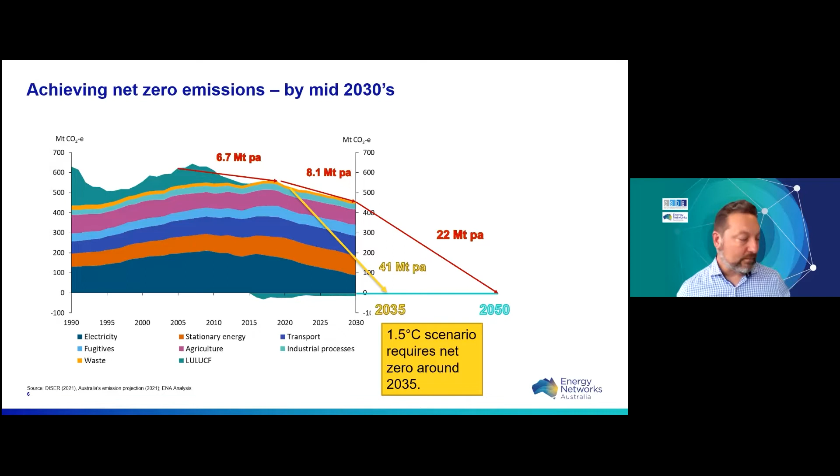So I'd like to talk about the role of renewable and decarbonised gas in helping us achieve emission reduction targets. In 2017, we produced a report called Gas Vision 2050. This was developed across the gas industry, including upstream gas producers, pipeline and distribution networks, and appliance manufacturers. It was a document in response to the Paris Agreement on climate change, outlining how transformational technologies would be deployed to reach net zero emissions from using gaseous fuels in Australia.

There are 4 pathways of reducing emissions from gas use. I'll briefly talk about some of these, then talk about decarbonising the fuel in more detail.

So energy efficiency is a technology that's quite well known. It's basically trying to replace existing appliances with more efficient appliances. We're also upgrading homes with more efficient features, such as increasing insulation. Closing your window and curtains at night is also a good way of increasing energy efficiency. That's actually, in some ways, a low cost strategy of reducing emissions, because if you don't use the energy, you don't produce emissions associated with it.

On the right-hand side, I've got carbon offsets. Once again, that's something that's currently available. It's quite easy to purchase carbon offsets. Most of the major electricity and gas retailers offer carbon offsets on their products, so you can already have net zero energy at the moment.

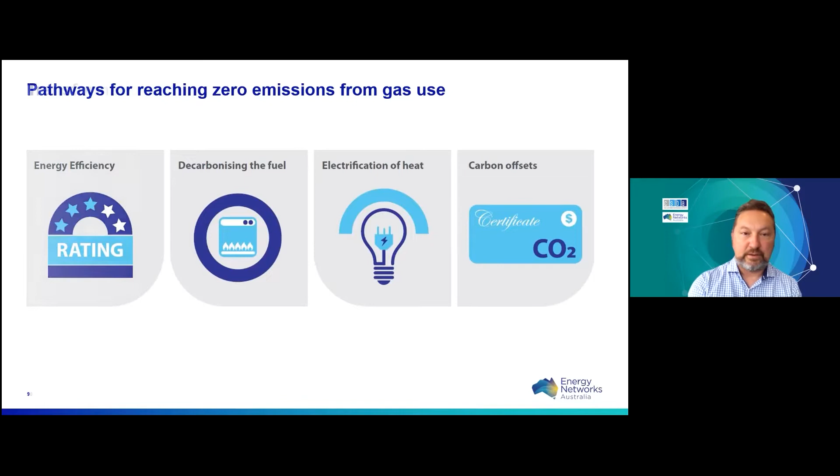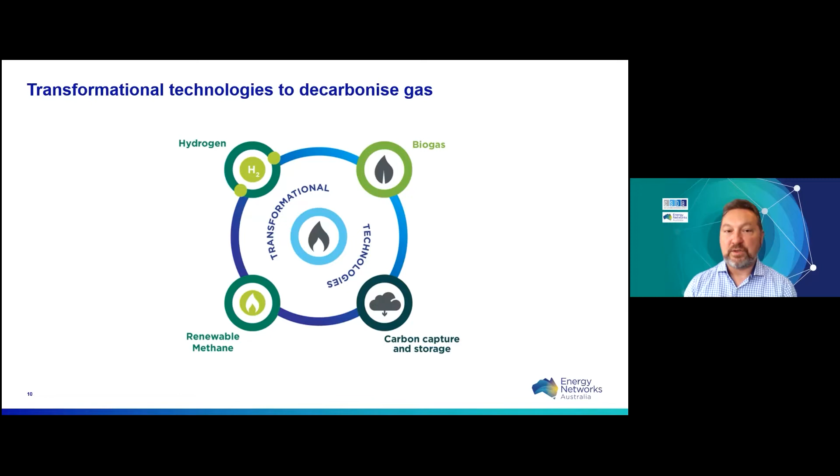Then I'd like to talk more about decarbonising the fuel, which is basically through transformational technologies. There are 4 transformation technologies we identified in Gas Vision 2050. One is the use of hydrogen, another is biogas and renewable methane, which are actually very similar - I'll talk about that as well. And then there's carbon capture and storage. I won't focus so much on that, as it's more a technology upstream for reducing emissions from industrial processes, gas production, and power generation. I'll focus more on the other technologies which provide emission-free gas that can continue to be used.

So we're on a journey to convert networks to actually produce and transport renewable gas by 2050. When we outlined our original document, we thought the next 5 years from 2017 up until the early 2020s would really be about beginning or doing more innovation and demonstration projects. I'll show in the next slide how we progress in that. Then in the next 5 to 10 years, probably towards the end of this decade, we'll be looking at reducing emissions by blending biogas and hydrogen in gas networks, replacing part of the natural gas with a renewable gas product, which lowers emissions. Then in the longer term, fully converting to that emission-free biogas or hydrogen.

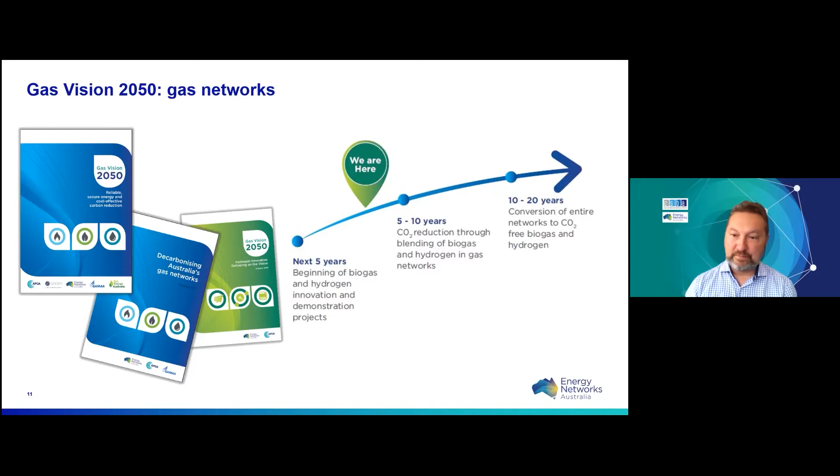This slide shows how we've already progressed that, how industry has already progressed that. There are a number of projects already operational - this slide I could probably talk to for 15 minutes, but I won't. I'll just briefly highlight that there are projects operational in Adelaide and Western Sydney that are already injecting hydrogen into the network, so customers are already receiving a small blend of hydrogen in their network. There's also plans for new projects to blend hydrogen into industrial precincts, and plans for larger scale projects where hydrogen can be blended into whole towns.

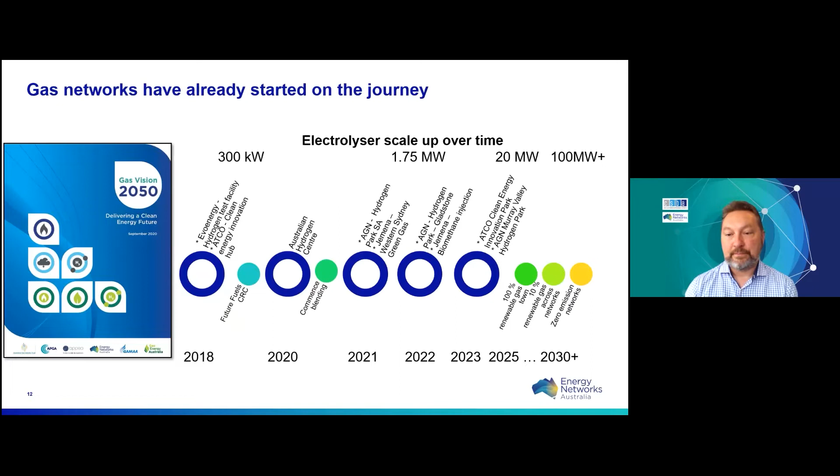So I'd like to talk a bit about the different pathways of producing renewable gas. This diagram shows how renewable methane can be produced. There are two general pathways. One uses organic waste - for example, landfill waste or organic waste such as food scraps from the house - that can be put into a biodigester, which then produces methane and a few other gases. Once that's cleaned up, it produces biomethane, which can be directly injected into the network once it's cleaned up to network specifications, and it basically works the same as natural gas.

The lower part of the diagram shows a synthetic renewable methane pathway, which looks at using hydrogen, reacting that with carbon dioxide absorbed from the air, and that also produces renewable methane, which similarly can be injected into pipelines and networks, and works the same as natural gas.

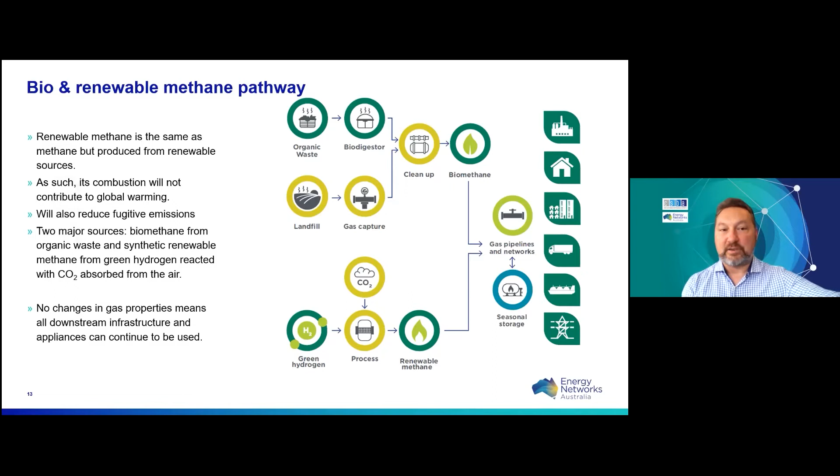One of the main challenges with biomethane is the resource potential. There's a lot of uncertainty about how much resource is available to produce biomethane and how easily it can be collected. Some of the feedstocks include organic wastes, agricultural waste, forestry waste. There's also discussion about energy crops, where crops are grown for the sole purpose of producing bioenergy.

There's a high level of uncertainty in the estimates of how much of this resource is available. But a recent report by ARENA, their bioenergy roadmap, showed that there's 2,600 petajoules of theoretical resource potential, and they saw that that could possibly produce 33% of gas in networks by 2050. As a reference point, the gas in networks for residential consumption across the country is 166 petajoules. So when you compare those two numbers, there's an awful lot of potential, but there's also an awful lot of uncertainty in that 2,600 petajoules and whether it is accessible or not.

That's why I mentioned on the previous slide the synthetic renewable methane, because that's another pathway that can provide that renewable methane.

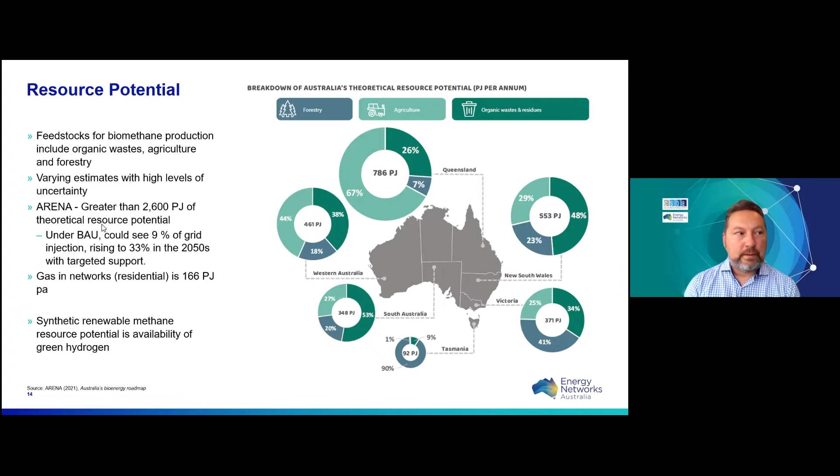There are also options in terms of revenue. In the biomethane process, you produce fertilizer, and you also avoid depositing the waste in landfill, so there's some revenue options. There's also policy options, and they've been deployed quite readily in the UK and in Europe. By a combination of all those different configurations, we're able to get to a competitive price for biomethane compared to the Sydney gate price for natural gas. So that provides a lot of opportunity there.

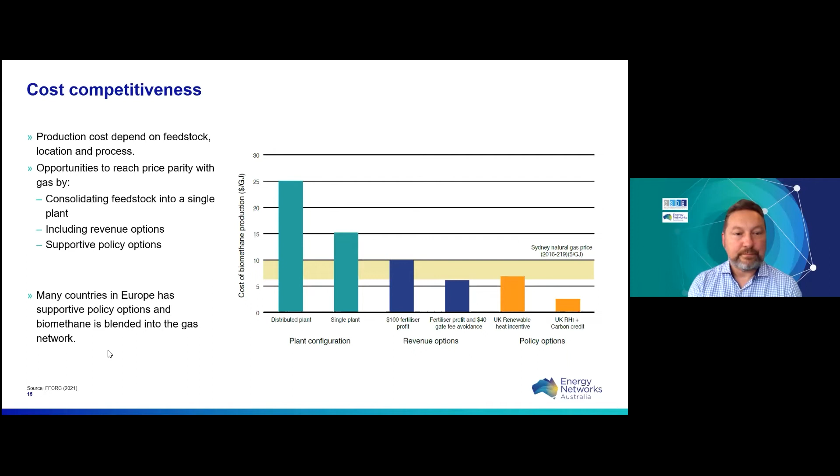So what are some of the implications for customers for biomethane, bio-renewable methane? It's a net zero emissions gas, and it's basically the same as natural gas, so it can continue to be used - you can continue to use the same appliances and have the same experience. There is uncertainty around the availability, but that can be supplemented by synthetic renewable methane. And there's also some discussion about what's the competition for this resource - will it possibly end up in a higher value sector, for example, aviation?

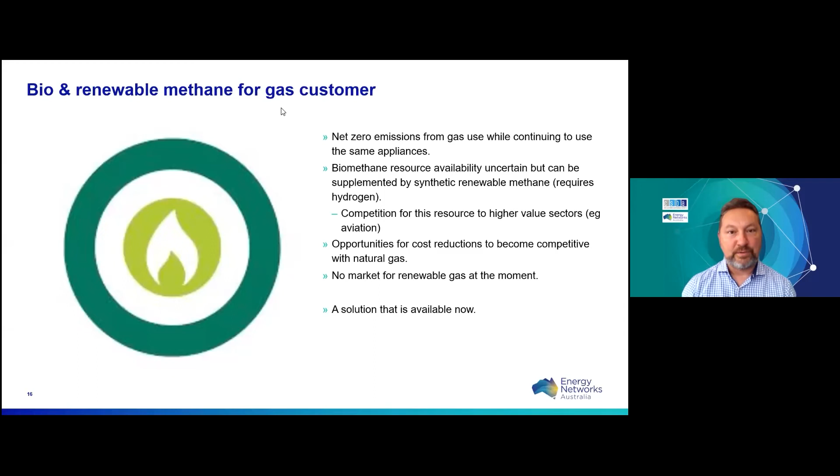There are opportunities to reduce costs to become competitive with natural gas. But at the moment, one of the main limiting factors for customers is that there's no market for renewable gas at the moment. There's a lot of demand for customers who want renewable gas, there's people who want to supply renewable gas, but there's still no market at the moment. So it's something that we need to work on.

Now I'd like to turn my attention to renewable hydrogen. This pathway shows that hydrogen can be produced from renewable electricity. It splits basically water from an electrolyzer - you apply renewable electricity to water in an electrolyzer that produces hydrogen atoms and oxygen atoms. Those hydrogen atoms are captured and then compressed, and they can be used as a replacement for gas.

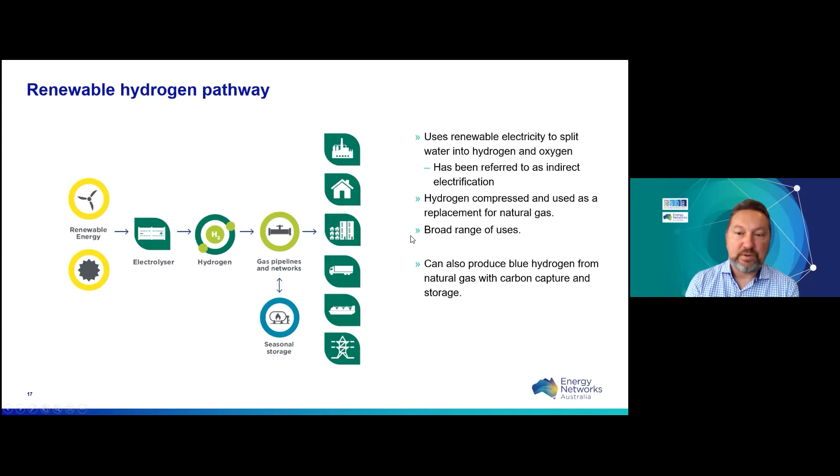Hydrogen has a broad range of uses, and I've got another slide coming up which shows that. It can also be produced from other energy sources, for example, natural gas with carbon capture and storage. There's a whole rainbow of colours of hydrogen that identify the different sources it can come from. But the main thing is the hydrogen that's produced is emission-free, so when it's used and burnt, it doesn't produce any carbon dioxide emissions.

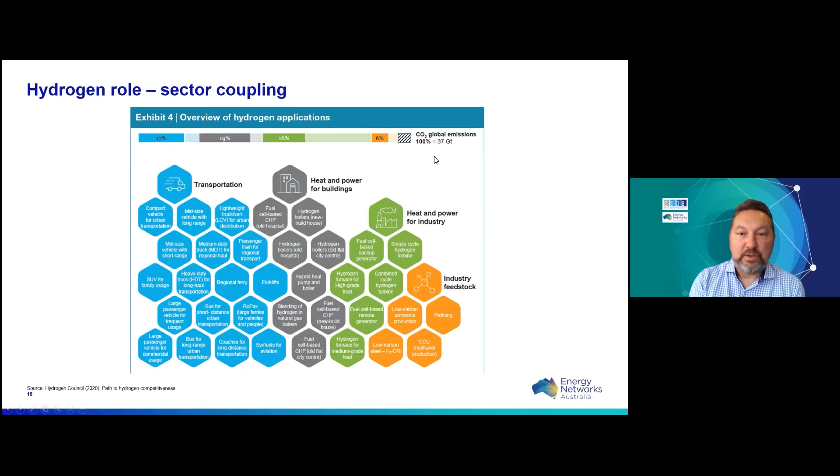This is that slide I was talking about with all the different applications. It can be used as an industry feedstock, for heat and power in industry and buildings, and also has a big role in the transport sector. So it has a very, very big role across the economy, and there's quite a number of projections out there that show the final energy demand in 2050 or so for hydrogen will be around 20 or 25% of the global energy demand.

Once again, cost is an issue at the moment. Currently, green hydrogen costs more than natural gas. Actually, grey hydrogen produced from natural gas also costs more than natural gas - that's not quite competitive at the moment.

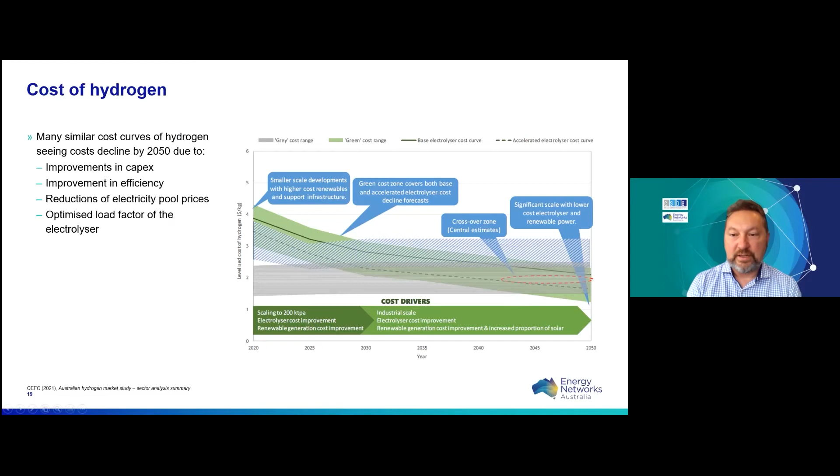There's a lot of work. I showed you a previous slide where networks are already investing in deploying hydrogen projects. And that work, combined with research across the world, is actually leading to major cost reductions in hydrogen. So by 2050, we'll see that green hydrogen becomes cost competitive with grey hydrogen.

What this also means is that hydrogen is competitive in some instances, for example, return to base vehicles. But for residential consumption, it's not quite competitive yet. This is some data from the Clean Energy Finance Corporation, which shows that the price gap between hydrogen and natural gas in 2020 is $1.50. That narrows to about 10 cents per kilogram in 2030, and in the early 2030s it levels out. By 2050, it shows that hydrogen is competitive as a fuel for replacing gas.

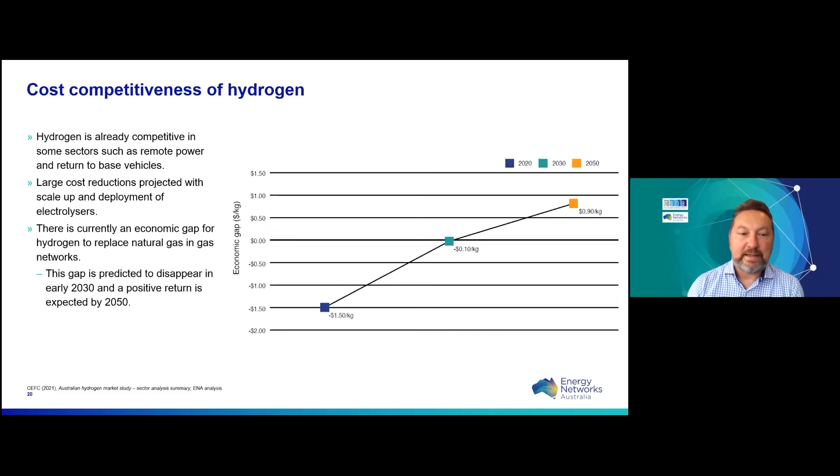Now, one of the things with hydrogen is that it behaves slightly differently to natural gas. So there's a role where we need to convert networks, and that's where there's some implications for customers. This is a conceptual pathway of how we convert networks across the country. From 2020 onwards, we can start blending hydrogen up to 10 or 20%. Appliances still work at that level, safely and effectively, so that's no concern.

Then there's a point where we need to convert a set part of the networks to 100% hydrogen. That will require appliance modification and a planned program to make sure that those appliances are converted in a safe and effective manner.

A lot of the networks in Australia, the gas networks, have already upgraded as part of their mains replacement program. That's really replacing their networks from the old cast iron pipes to new plastic pipes, and those pipes are actually capable of transporting hydrogen safely. So a lot of that work has already been done.

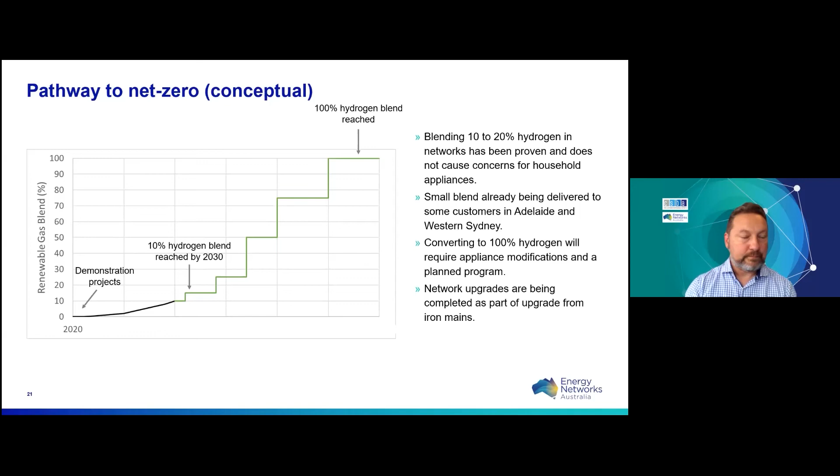There is also previous experience we can draw on in converting the network. Going back to the late 60s, Australia's gas used to be Towns gas, which was basically produced from coal. The discoveries of natural gas in the mid-1960s provided this as a product to the market. So through that process of the replacement program, it was about a 12-year program where households were converted across the country to move from Towns gas to natural gas.

So we have done this before. It was 50 years ago. I'm sure the social environment and customers were quite different 50 years ago, but that's something that we need to work with.

Appliances for hydrogen do exist. There's demonstration projects in the UK where they've got appliances working, cooktops working, boilers, hot water heating systems and so forth. So there are appliances on the way, but they aren't commercially available yet.

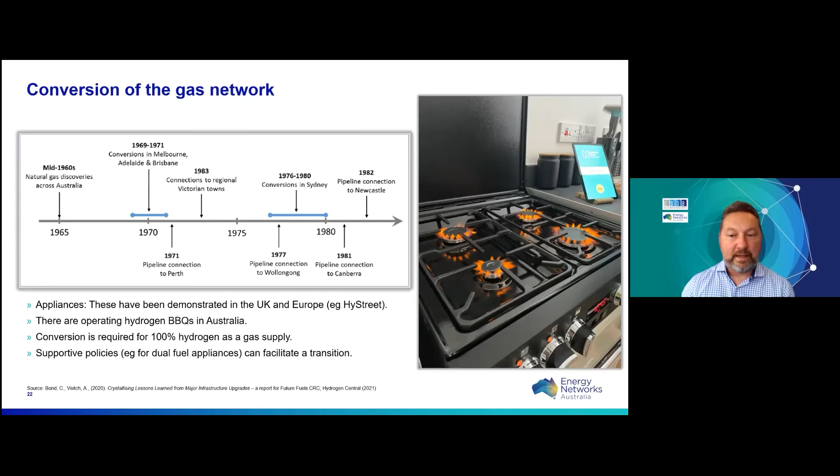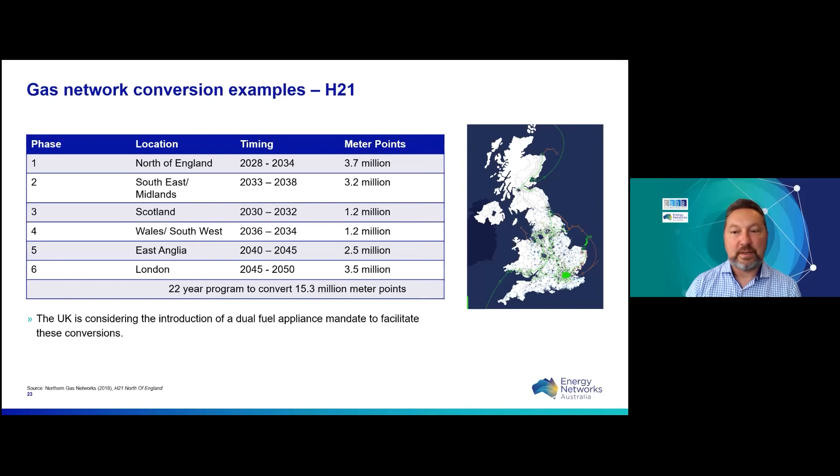This is just an example of a plan that the UK has developed of how they can convert all their natural gas connections to hydrogen. As you can see, converting 15 million meter points takes quite a number of years. They've phased this as doing one region at a time, just to allow build-up of hydrogen production and then focus on different regions to convert that from natural gas to hydrogen. So this is a long-term journey.

Each one of our gas distribution networks has a more detailed version of that, or is working on a more detailed version of that with slightly different ambitions, but this is roughly a plan to identify how we can reach net zero from gas use networks.

So what's the impact for customers? No changes really for blending hydrogen. In the next 5 or 10 years, when we introduce a blend, there's no changes. After that, there's a need for a planned conversion to convert to 100% hydrogen, which might produce a slightly different experience for customers. Hydrogen is a different fuel, it burns slightly differently, so there might be some slight changes, although a lot of the appliances that have been built today operate the same as existing appliances.

Supportive policy can minimise disruption. By that I mean, especially from an appliance side, if there's a mandate to, say, introduce dual fuel appliances, that minimises the conversion process, making it easier for customers when that conversion happens. There's data out there that says it becomes cost competitive with gas in the 2030s. But once again, we don't really have a market for renewable gas, so that's something that we need to work on.

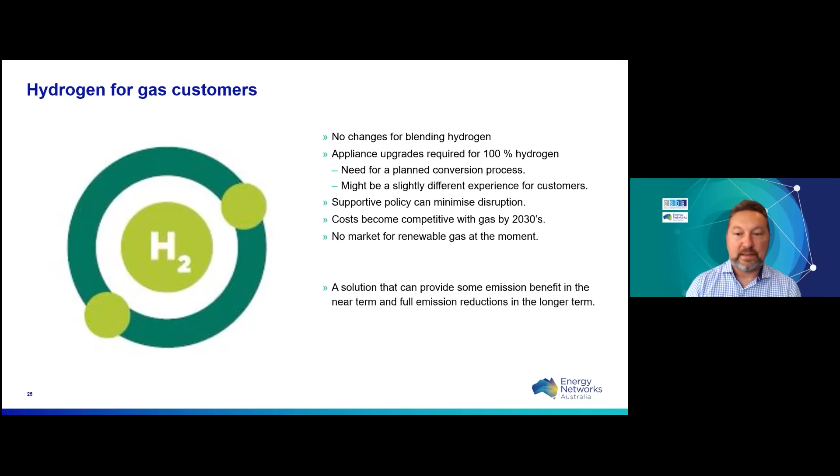One of the questions is: biomethane and hydrogen, what's best for customers? I don't really have an answer to this yet. I think there's a role for both, especially in the near term. Biomethane has an important role, and in the longer term hydrogen may have a more important role. It also depends on the different regions. In agricultural regions away from a gas network, building a biomethane facility to service a local community may work better, while hydrogen may play a bigger role in converting whole states, for example Victoria, to replace their gas use. So there's not really a single best answer. It all depends on demand, resource availability, cost, the speed of transition, and other resource demands.

I was just going to quickly talk about the benefits of renewable gas networks. In some ways this also addresses the question of why not just electrify, because there's been a lot of discussion about maybe we should just electrify. I brought this down from 10 points to 5, and I'll quickly run through them.

Gas has lots of benefits. It's used across the whole country in a whole lot of different sectors, and some of these things you cannot electrify. For example, industrial feedstocks cannot be electrified, you can't really electrify exports, and it's difficult to electrify residential and commercial heating. So by continuing to use a gaseous fuel, you'd be able to continue servicing all these different sectors.

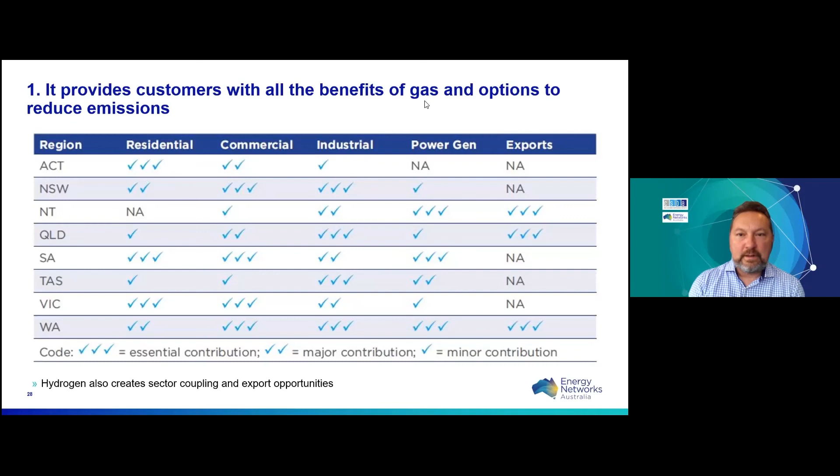Related to this is the second point: gas infrastructure is there to meet heating load. It's purposely built. This is the Victorian heat load - as you can see there's a massive heat load in winter, shown in the light blue chart. The gas infrastructure and associated storage infrastructure is actually built to meet that heating load, so it's not easy to replace.

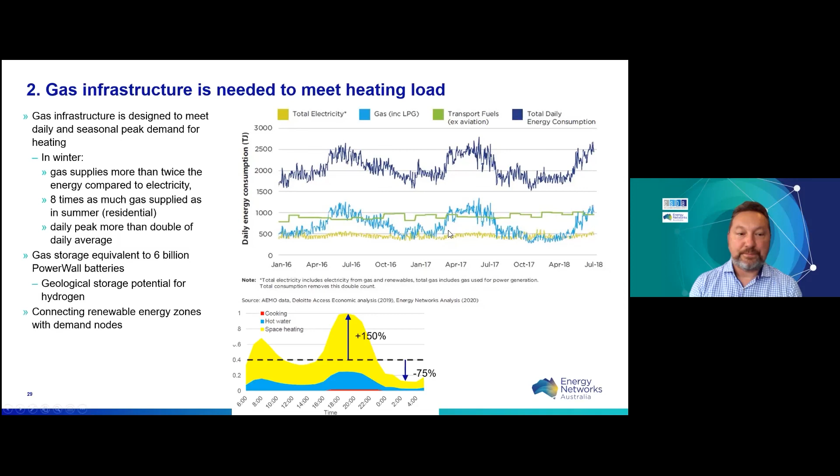When you introduce hydrogen, you actually increase your utilization of grid-connected renewables. There's already a large amount of renewables that gets curtailed, so by being able to use that electricity you can convert it to hydrogen, creating high utilization of that renewable energy generation. Then you can also use that hydrogen in your networks.

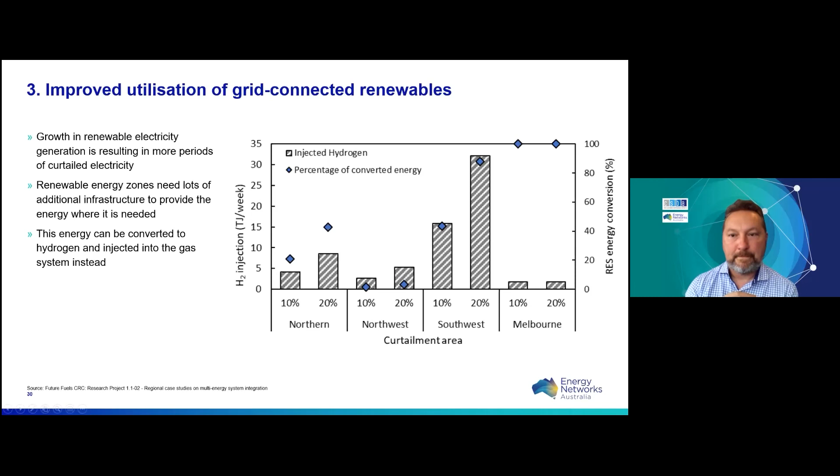This is some other research with Future Fuels CRC that looked at the emissions when you electrify too quickly. If you electrify too quickly, you end up replacing a lot of the gas you use directly with peaking gas load, and this happens at night and in colder periods when there are lower levels of renewable generation available. The implication is that if you push electrification too fast, it may actually increase emissions in the short term.

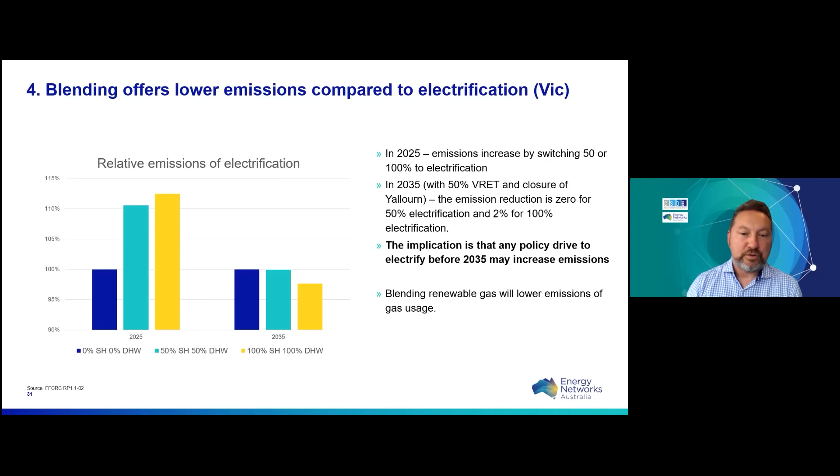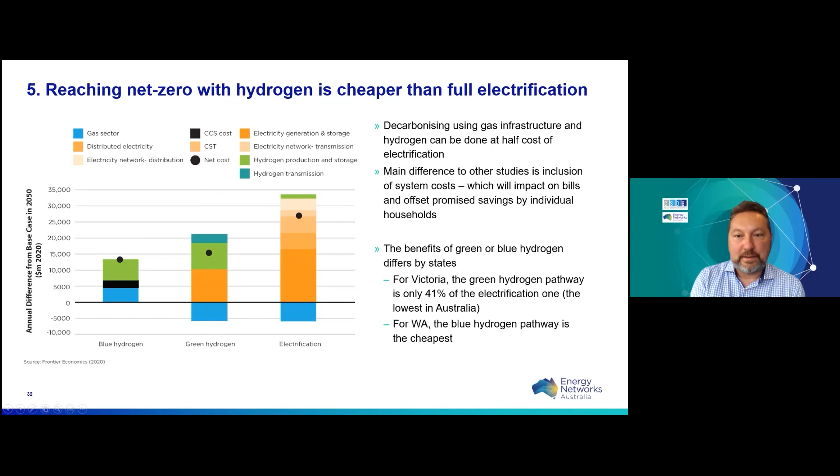Lastly, some work we've done with Frontier Economics shows that when you look at the whole gas sector, using a renewable fuel such as hydrogen is cheaper than full electrification - by a factor of about half the cost. For Victoria, it was actually only 41%: the cost of hydrogen to replace natural gas is around 41% of the cost of electrifying the state. There's a lot of debate, discussion, and assumptions around this, but I think it's a really key point to keep in mind.

The role of policy is really there to help support technology projects and help identify the resource potential for biomethane. As I mentioned, there's no market yet, so policy is there to enable market mechanisms, looking at renewable gas targets, for example reverse auctions, but also to support the local appliance industry to build capacity to provide hydrogen appliances.

So just to summarise, reaching net zero requires action across the whole economy. This will impact customers in many ways - I've only raised a few this morning, and I'm sure there are many more we can identify. Renewable gas provides an option to decarbonise, and blending hydrogen in networks offers a lower cost opportunity to scale up hydrogen production supply. We're already doing work - the gas networks are already demonstrating the role of renewable gas. We'll continue to do so, and supportive policies can minimise the disruption.